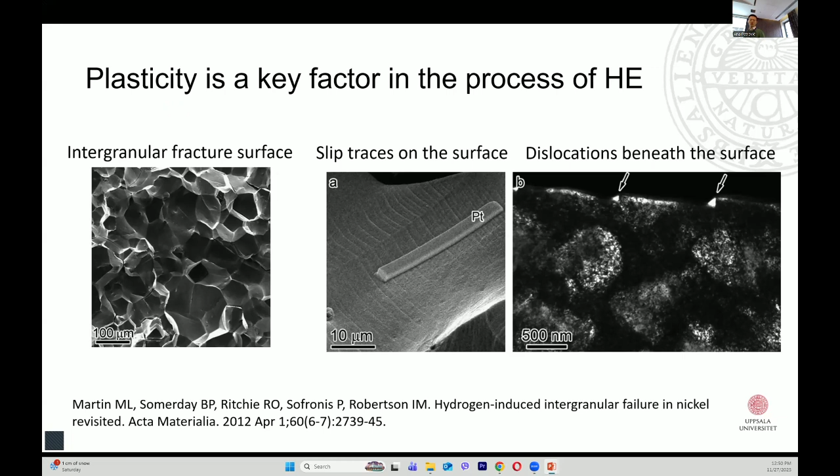And there has been sufficient experimental evidence showing the existence of plasticity under the seemingly brittle fracture introduced by hydrogen. And this highlights the important role of dislocations or localized plasticity in hydrogen embrittlement.

In the literature, there have been several theories about the interaction between hydrogen and dislocation. There are opinions that hydrogen would promote dislocation emission, multiplication, and mobility. But there are also sufficient evidence, mainly on the atomistic side, claiming the opposite.

But anyway, I think a general consensus in the community is hydrogen embrittlement is really complex, and we may need more than one theory to explain the phenomena, and this is dependent on material and loading conditions.

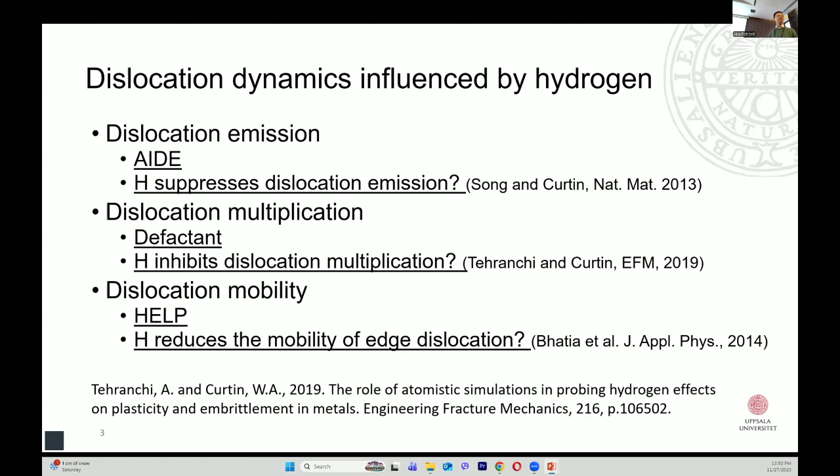So in order to really dig into the interactions between hydrogen and dislocations and visualize the interaction, here I would like to try to sell to you an approach which is called discrete dislocation dynamics. In this approach, we discretize dislocation lines into straight segments so that we get a bunch of nodes. And in each time increment, we can evaluate the nodal velocity of each node so that we can capture the entire evolution of the dislocation structure.

And with this approach, it is possible to simulate some elementary processes of dislocations, such as the operation of a Frank-Read source, formation of dislocation junctions.

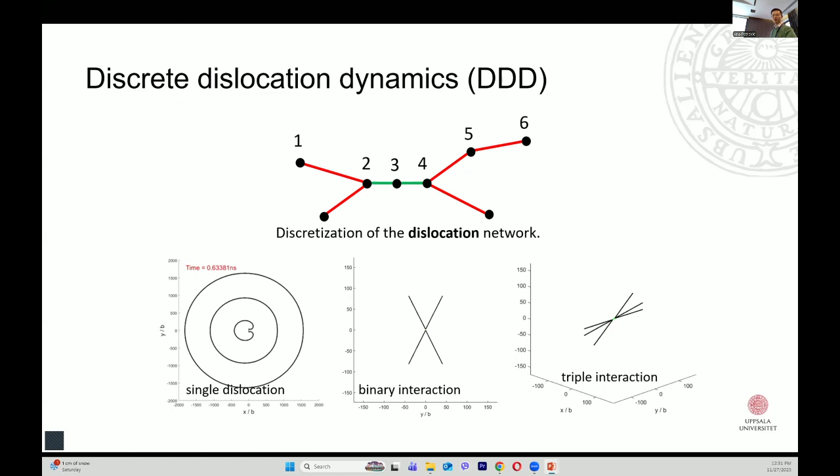If we put these elementary processes into a finite volume, and let me see, there's an issue with the, yeah, so if we put the elementary processes into the volume, well, now what you see is just the elementary processes, but there should be a box surrounding it. So that is the finite volume, okay?

So if we consider a finite volume and couple the dislocation dynamics simulation to finite elements approach, we will be able to simulate the operation of the dislocations in the volume so that we can capture the microscale plasticity in a real microscale experiment. And further, we can introduce hydrogen into the dislocation dynamics framework.

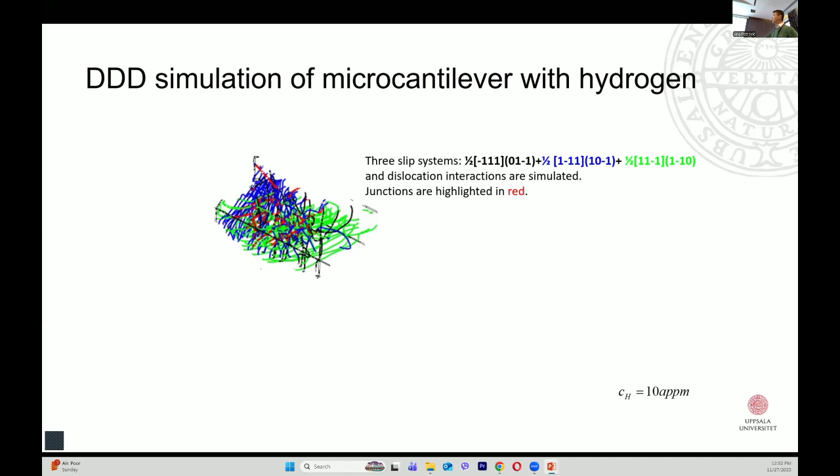And we do this by considering the hydrogen modified velocity of dislocations as well as the hydrogen lowered dislocation energy profile. If the energy is reduced, the line tension of the dislocation will be reduced, and dislocations will be more easy to be generated. So this is the general idea.

And with this framework, incorporating hydrogen, we can simulate a very clean material system. This is a single crystal, and we look at a single slip system so that we can accumulate a dislocation pileup after applying load. And if we simulate the dislocation pileup with and without hydrogen and overlap these two figures together,

so the black solid lines represent the dislocation lines when simulated without any hydrogen. And after hydrogen is added, we get the blue dashed lines. All the other conditions are the same.

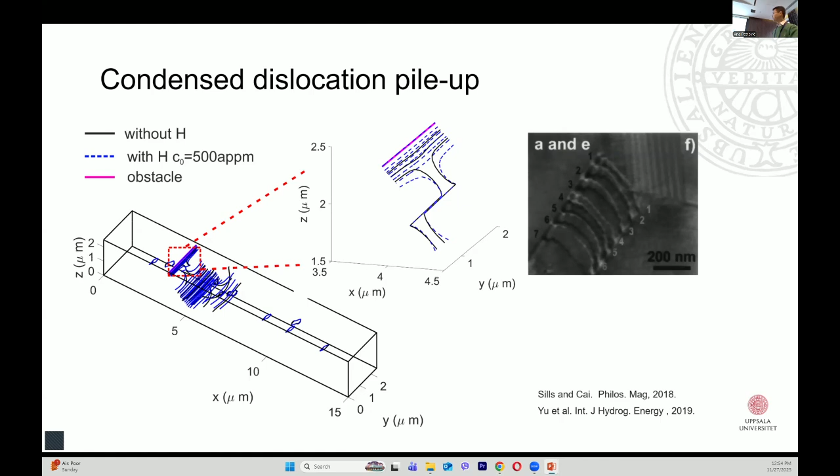And what we can see is hydrogen can reduce the spacing in the dislocation pileup, indicating that hydrogen will increase the local dislocation density. And this is also in accordance with the famous experimental evidence reported in the 1990s. And also, knowing that in the engineering practice, the materials are mainly alloys.

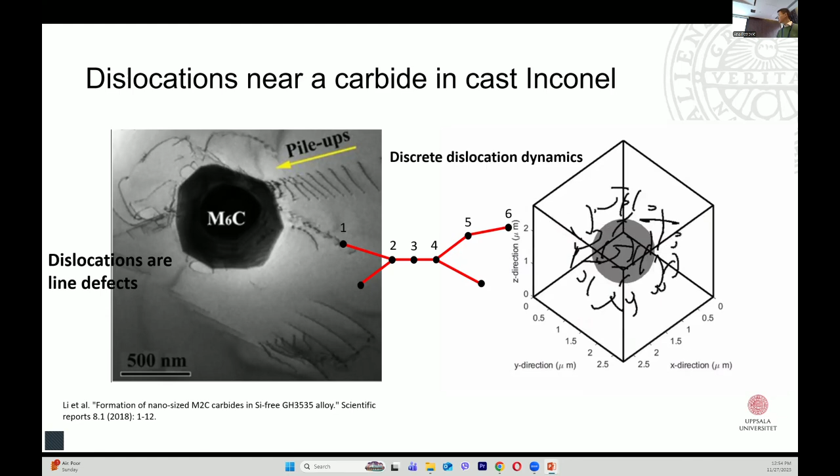So we tried to add an inclusion or precipitate into the pure metal, and we were able to simulate the dislocation entanglement with the approach around the precipitate, like this. And again, we simulated the scenario without and with hydrogen, and we get these two entanglements. What you can tell is with hydrogen, the entanglement density and also the complexity are increased a bit.

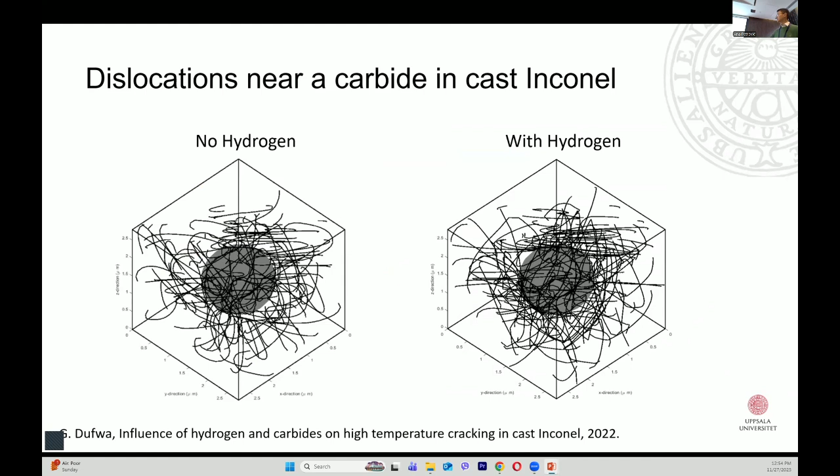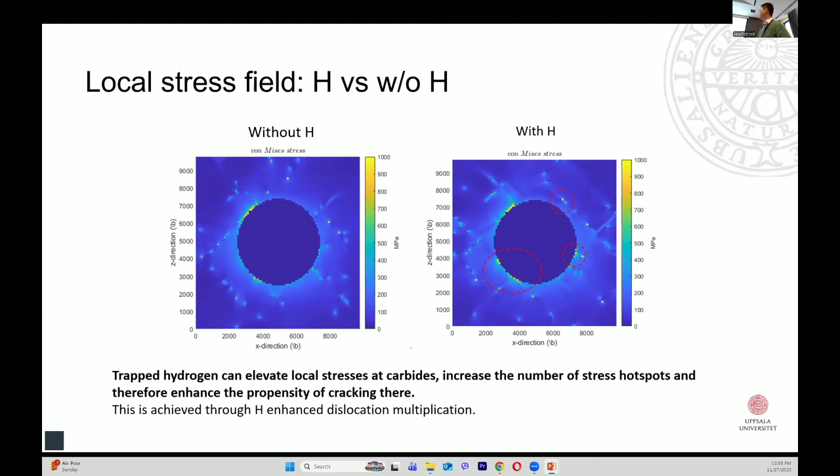So all the results presented earlier are about the influence of hydrogen on dislocations. But in my title of the talk, I mentioned we have interaction, meaning that the influence should be in two directions. So how do the dislocations influence hydrogen distribution and diffusion? Well, we recently used the dislocation dynamics as the basis to simulate hydrogen diffusion.

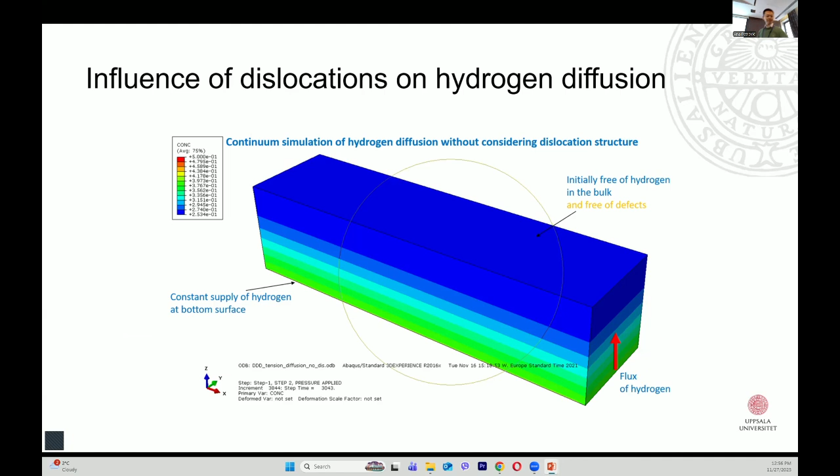And because of that, if we do not have externally applied stress concentration, all the simulated hydrogen profiles will be uniform. So if you look at the same height, we have the same concentration. That is because the trap is smeared in the volume. But we know that in reality, we have dislocations, and dislocations are trapping sites. So could hydrogen actually distribute in a non-uniform way? Well, we can use this approach to check it.

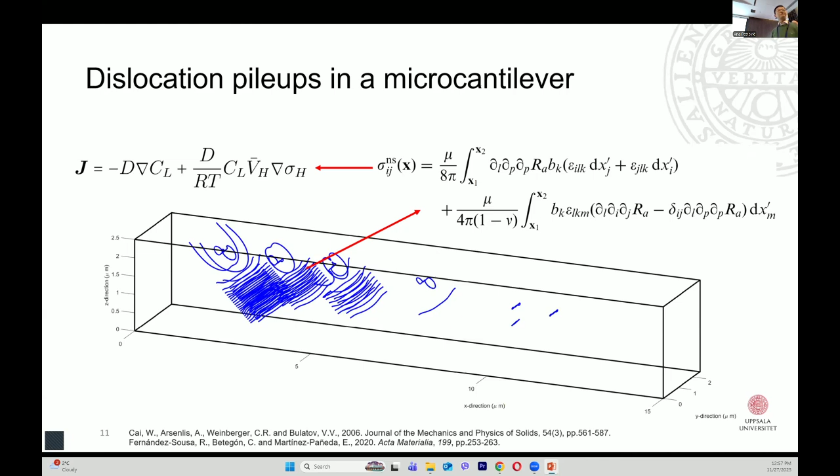We simulated first dislocation dynamics and get this kind of a dislocation structure. And then, as mentioned, we can evaluate the dislocation stress field, and from the stress field, we can extract the hydrostatic stress field, as well as the gradient of the stress field. And then we apply this classical modified Fickian diffusion to simulate hydrogen redistribution. What is important is, in this process, we do not explicitly consider any trapping parameters like trap density, trap binding energy. We don't consider them.

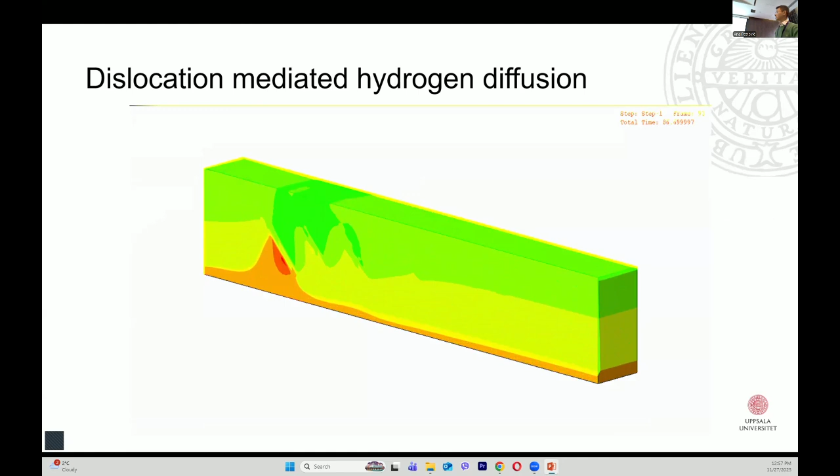And this is our simulated diffusion profile. And apparently the diffusion is non-uniform, in contrast to the uniform profile I presented earlier. And the reason is exactly that we considered the discrete dislocations, and their stress field directly governs the hydrogen distribution without explicitly considering any trapping effect. And this is done in Abaqus with a user-defined subroutine.

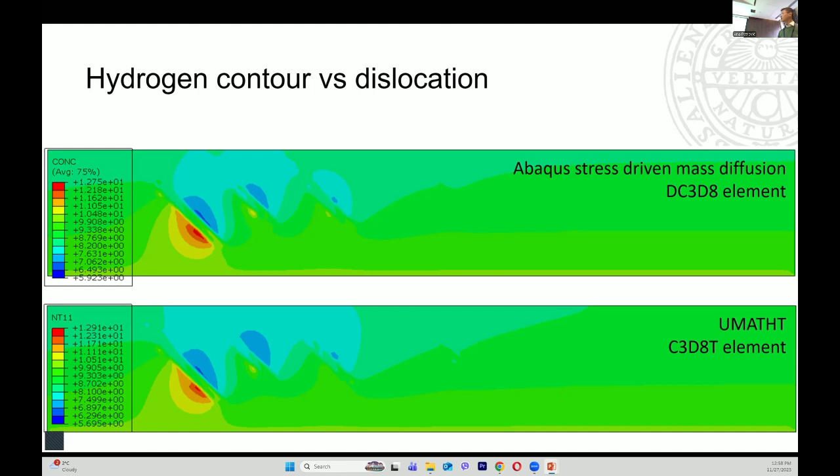And we also compared our results to the Abaqus embedded diffusion, which the previous presenter, I think, used on this platform. And we can see good agreement, which adds to our confidence level. And further, if you compare the non-uniform distribution profile with the discrete dislocation structure I showed earlier, and this is a 2D view, you can see that really it corresponds to the locally accumulated dislocation pileups. So with this approach, we show the possibility of using DDD to directly simulate hydrogen diffusion and redistribution.

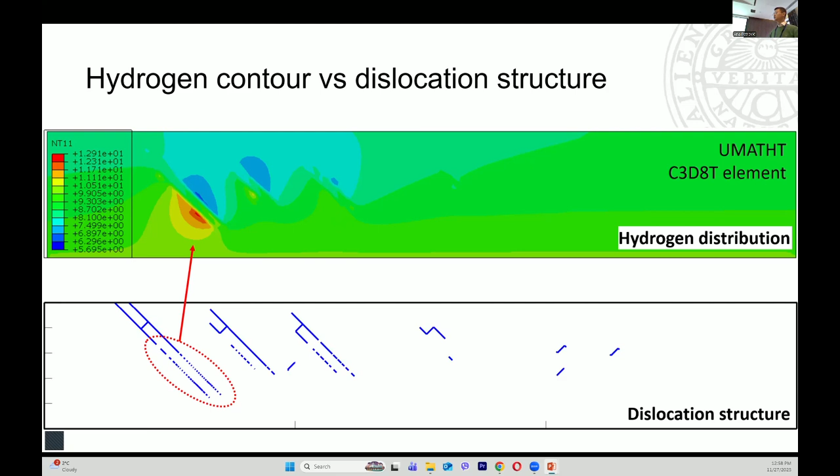And in the future, we could use this approach to calibrate the dislocation density and dislocation binding energy, and we can compare it to the experimental values. And further, this provides a way to really link hydrogen redistribution to the microstructure. So this could be a potentially promising approach, I believe. But the key drawback of the approach is it can only simulate single crystals for now. So I have to warn you about this.